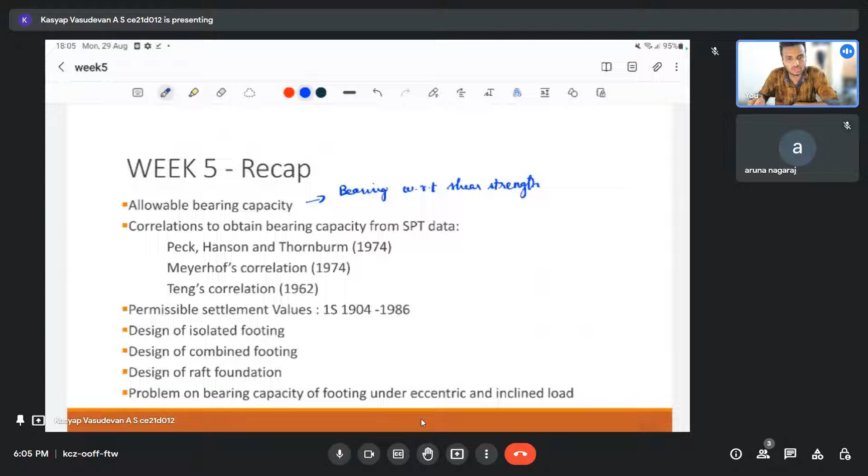One being our shear strength, in other words, bearing capacity with respect to shear strength that we have been already discussing all these days with respect to our different bearing capacity theories. And the other one is bearing capacity with respect to settlement.

So both the values might be different. We have to choose the minimum value among these, because if one is say 400 kPa with respect to shear strength and 200 kPa with respect to settlement, we cannot design with respect to 400, because our settlement will not be satisfied. And in many cases, settlement will be governing our allowable bearing capacity. So we can only allow whichever is the minimum value among these two.

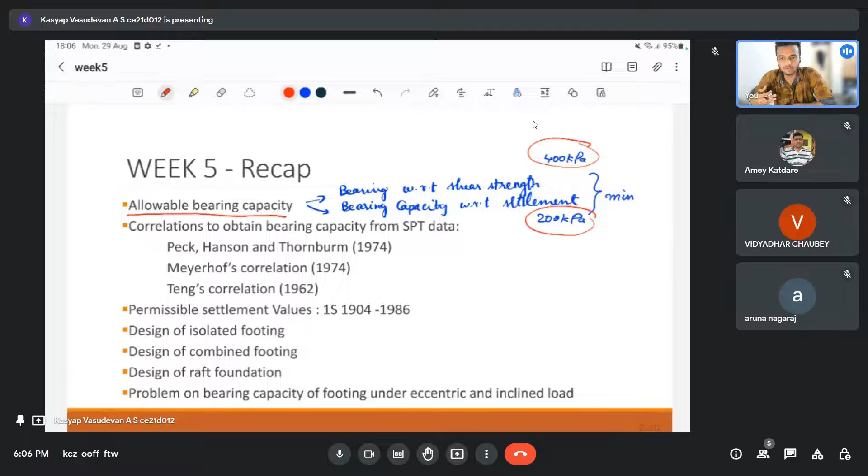So we saw last week how to arrive at the settlement. The point about that was the definition of allowable bearing capacity lies in the fact that which of these parameters is governing. Generally it could be settlement, because most of the cases shear strength failure will happen only after a huge settlement. But for our serviceability condition, we cannot afford to have settlement beyond some values that we'll see in the coming slides.

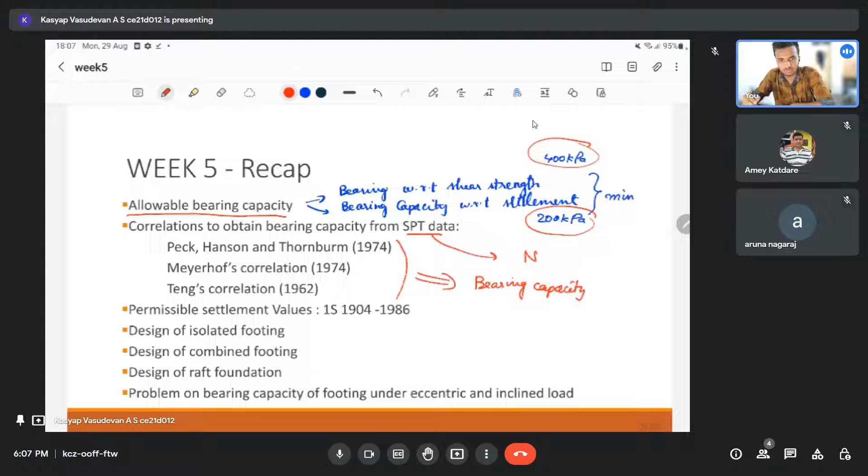And after this, sir discussed about different correlations. So we had talked about SPT test, from which we will get N SPT number, N value, which can be corrected, and that corrected N value can be used for different correlations to arrive at our bearing capacity, or even settlement. There are three methods discussed: Peck-Hanson and Thornburn method, Meyerhof's correlation, and Teng's correlation. All three were discussed, and even a numerical was solved on this.

After that, permissible settlement - this was the settlement I was talking about. We need to know these values, which are arrived at for different countries. It might be slightly different here and there. For IS code, they have specified certain settlements which can be allowed. So many times our bearing capacity might be very high when we are doing it with respect to shear strength, but with respect to settlement we'd have to check and see whether it is satisfying. If it is not, we'll have to redesign.

So design was also dealt with this week. We talked about design of isolated footing, combined footing, and raft footing. There are only small differences here and there. All three were discussed by sir.

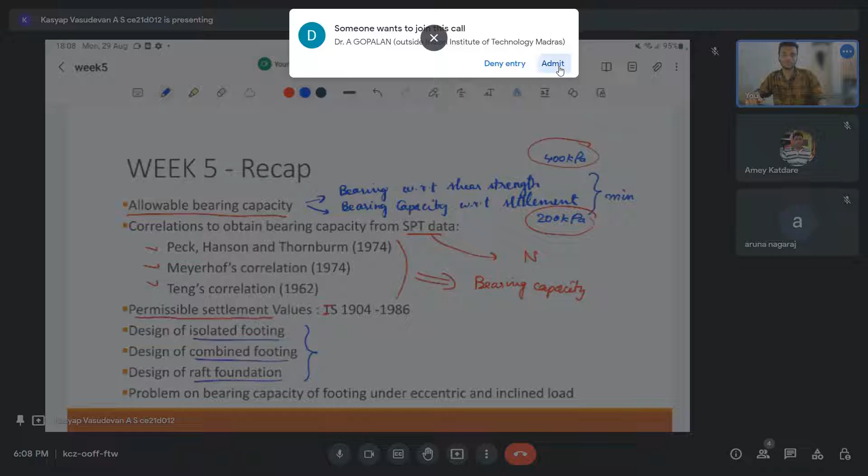And at the end of the week, sir also started solving a special scenario, a special question which dealt with both eccentric and inclined loading. In the two weeks before, when we started with bearing capacity, we were taking conventional problems, but here he began solving problems where we have a load which is both eccentric and inclined with an angle, with respect to the center line.

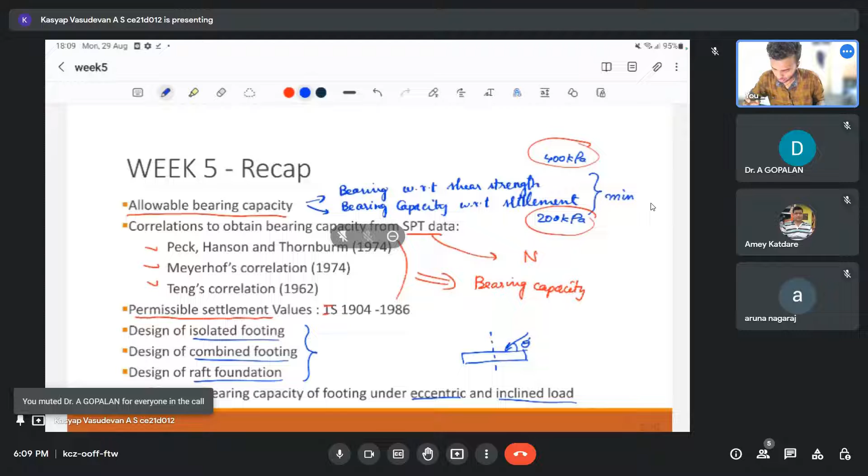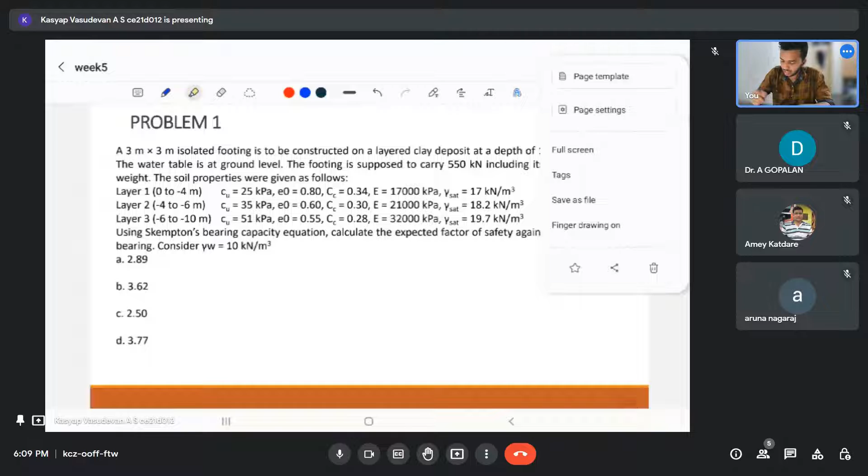Okay, so problem one. This problem deals with Skempton's bearing capacity equation. I think it was discussed in second or third lecture, he had solved a similar problem based on this. Skempton's bearing capacity equation is only applicable for clay soils.

So the basic equation is we have net ultimate bearing capacity directly. The net ultimate bearing capacity expression is given as Cu NC. This is the direct equation for Skempton's bearing capacity. From the equation itself, it's quite evident that it's only applicable for clay soil. So you have basically Cu and NC. Let us just define these terms properly.

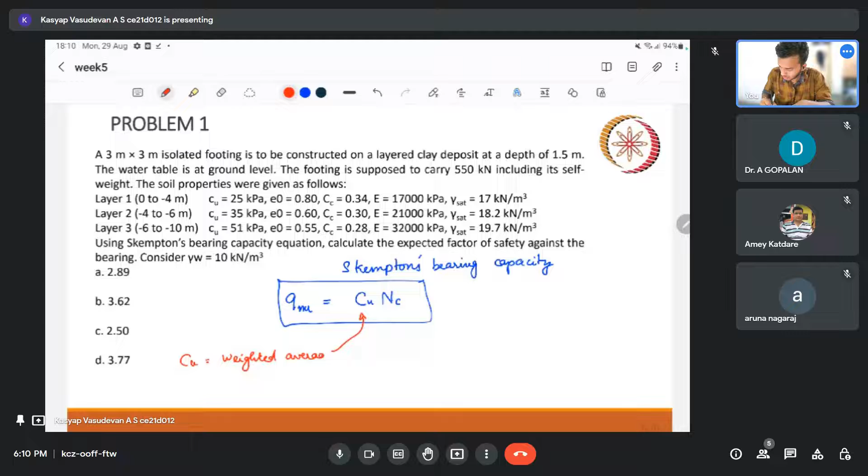Cu is nothing but our cohesion. But with respect to this question, we need to take a weighted average of cohesion within our influence zone.

When I say cohesion, I mean undrained shear strength. Cohesion influence zone - I'm defining it this way because we have a layered soil, so our influence zone might span multiple layers with different Cu values. The particular Cu value we're interested in should be within our influence zone.

The next term is NC, the bearing capacity factor for cohesion. This NC is specified as 5 times (1 plus 0.2 B by L) into (1 plus 0.2 Df by B). This is for rectangular footing.

So it's as simple as that, only two terms are there. In this question, we have a square footing of 3 into 3, at a depth of 1.5 meter. Since it's a square footing, we can simplify this. Since B and L are equal, I can directly write 5 into 1.2, into 1 plus 0.2 Df by B. This becomes 6 into 1 plus 0.2 Df by B. So I've simplified it for the square footing.

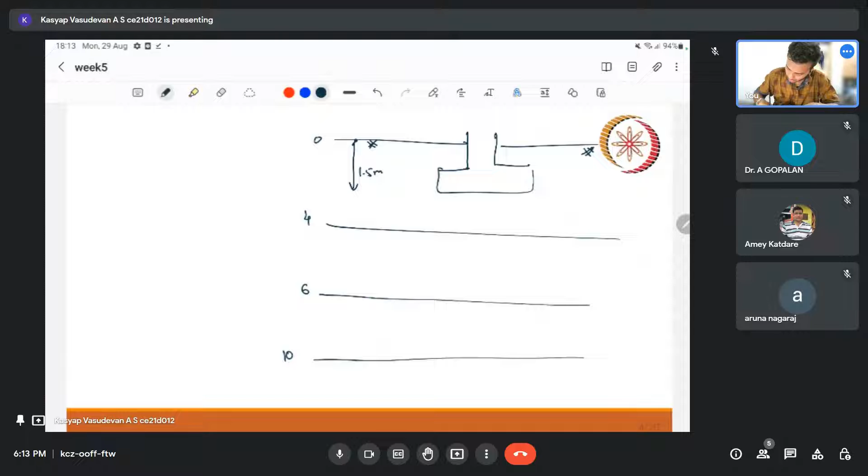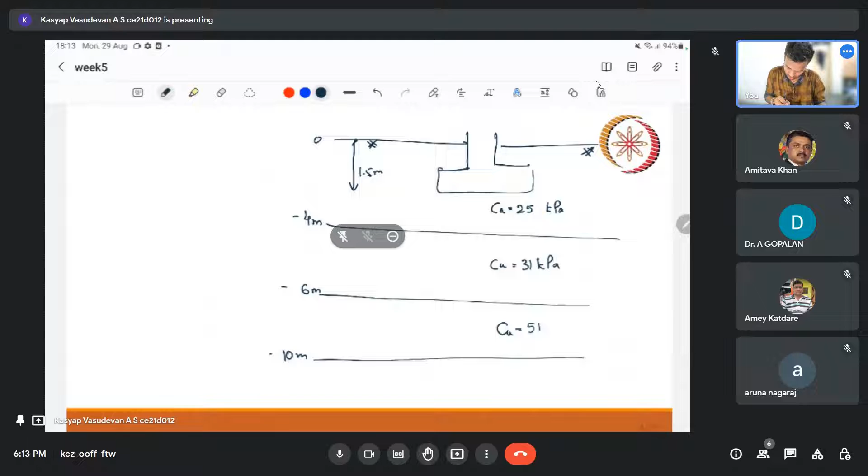Okay, so we have a layer, let's draw it to make it clear. From ground level, the depth of footing is given as 1.5, and we have three layers. Layer 1 is 4 meters, then 4 to 6, then 6 to 10 - so we have 0, 4, 6, and 10. We have Cu values 25, 35, 51. So Cu equal to 25 kPa, 35 kPa, and 51, C equal to 51 kPa. So layer 1, layer 2, layer 3. This is a 3 into 3 meters square footing, and our load is given as 550 kilonewton.

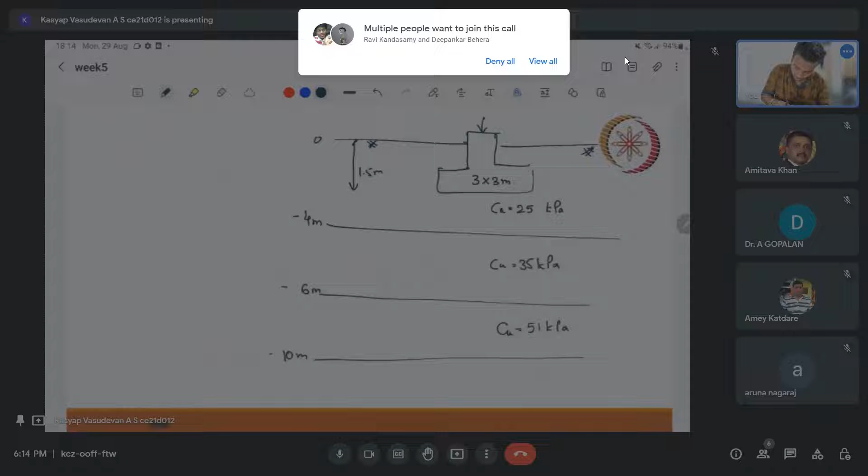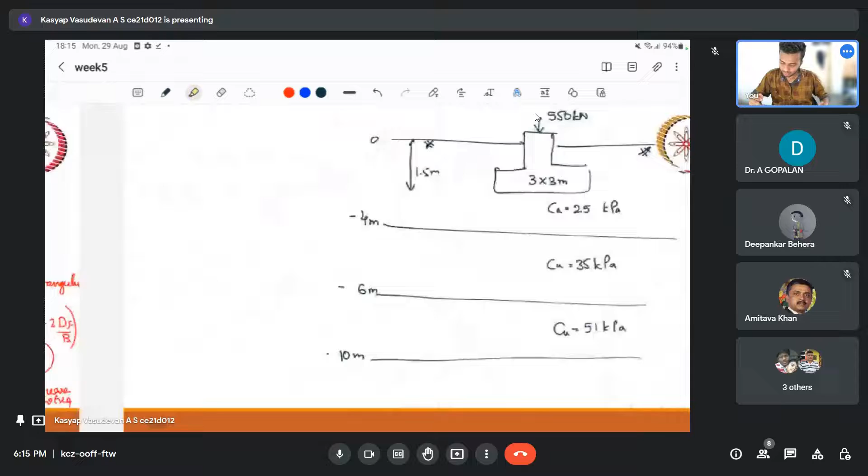So it's very simple - first, what are we supposed to find? We need to find, using Skempton's bearing capacity, the expected factor of safety against bearing. That means we need the bearing capacity with respect to bearing, and the actual acting pressure right now. If we find the ratio, we get the factor of safety - the capacity divided by the present load. So the net pressure acting right now, Qn, the present pressure is nothing but 550 divided by 3 into 3, that is 61.11 kilonewton per meter square.

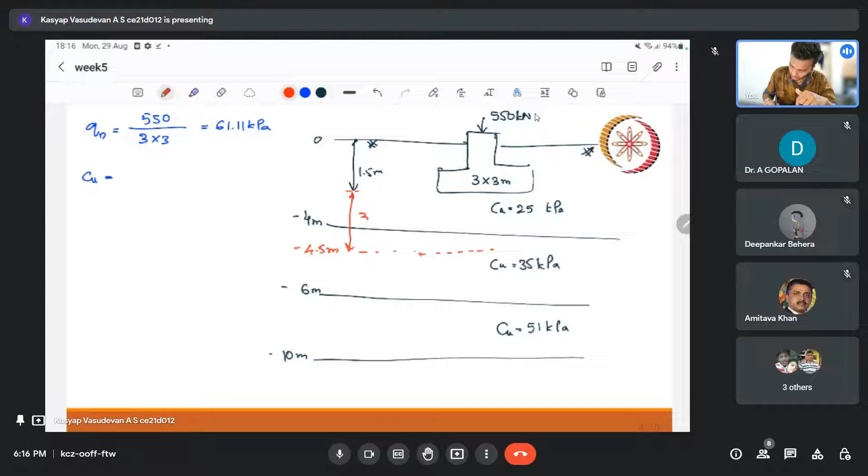Having said that, we need to find Cu, which is the weighted average. So what is the influence zone for bearing capacity? If you remember, the influence zone is the width of the footing - the depth which corresponds to the width. So this is 3 meter, below the footing I have to go 3 meter, that is the B value. So 1.5 plus 3 is 4.5, so this level will be 4.5 meter, that is 3 meter B. So this is the influence zone - within this zone, what is the weighted average of the cohesion?

So first 2.5 meter - this can be split into 2.5 meter and 0.5 meter. The first 2.5 meter is 25 kPa, the next 0.5 meter is 35 kPa. Divided by the total length of 3 meter - this is how you take the weighted average. The weighted average value comes out to be 26.67 kPa.

So this is the influence zone, 1B below. If you remember, for settlement we had taken 2B - that was only for settlement, whatever is in between 2B we have to consider. We calculated settlement last week - the reason behind 2B was because of the Boussinesq equation, where we assume the pressure bulb for 10% of the applied pressure, which will be 2B deep from the footing. That's why we take 2B for settlement. Here it's bearing capacity - that's because of our failure surface, our elastic zone is assumed to go only up to B, so we take that.

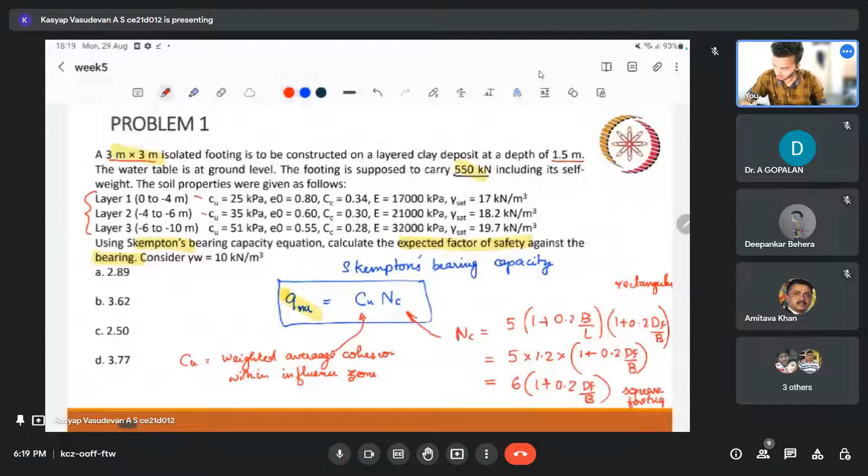This was quite straightforward. In the next question, we are extending this with the same data. The next question says: consider the data given in the previous problem, estimate only consolidation settlement after applying all necessary corrections.

Give depth correction factor. So here we are supposed to find consolidation settlement, and correction factors are given: depth correction is 0.89, pore water pressure is 0.7. We have pressure distribution. This is quite the same as we had done before in the previous classes.

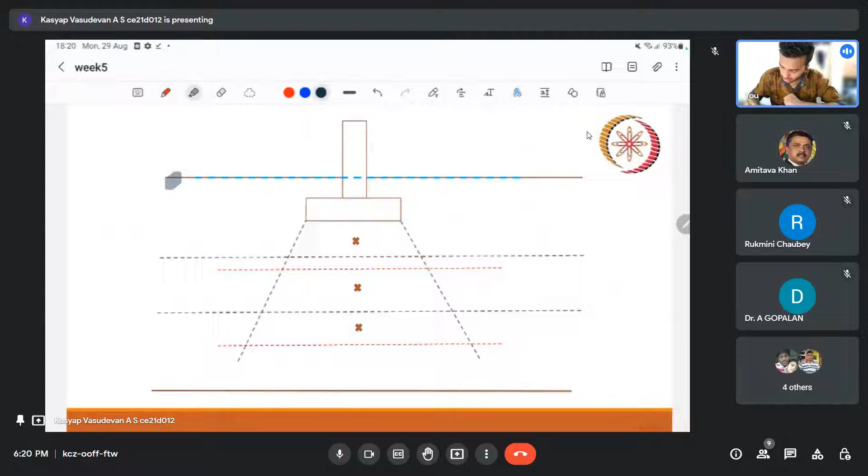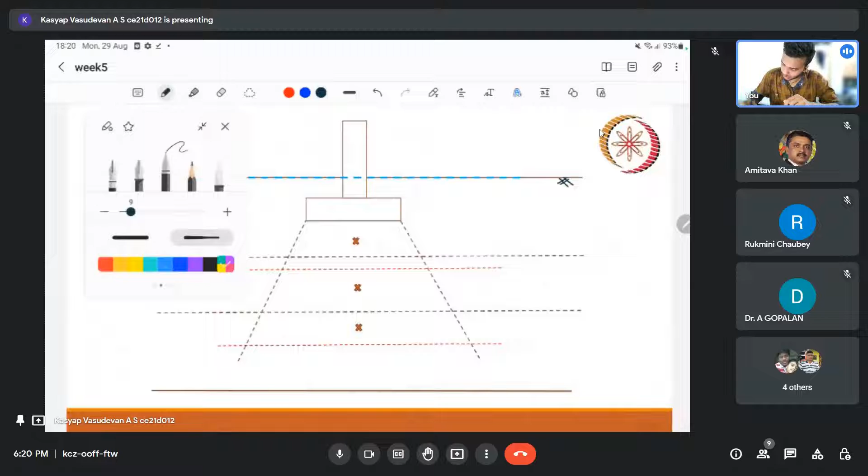We have different layers, so let us write it down properly so this becomes easier. This is the ground level. Have they mentioned water table? Water table is at ground level, so this is the groundwater table.

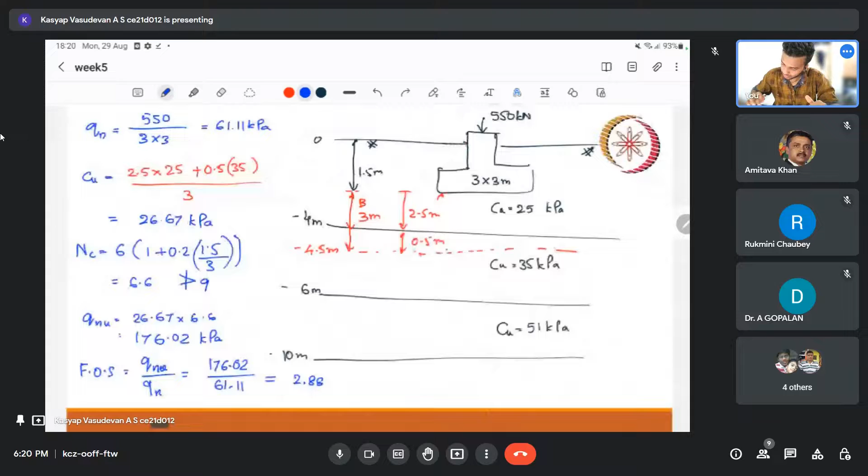Let me write whatever is required for us. Our cu value is for layer 1 - here we did not want cu. We have initial void ratio value, compression index value, and these things are not required now. Okay, density.

Just for clarification: e naught equal to 0.8, Cc equal to 0.64, gamma sat equal to 17 kilonewton per meter cube, E is our modulus equal to 17,000 kPa.

In layer 2, we have e naught equal to 0.6, Cc equal to 0.3, gamma sat 18.2, E is equal to 21,000 kPa. Layer 3 is equal to

0.55, Cc equal to 0.28, gamma sat equal to 19.7 - I'm writing from the question itself - and E is equal to 32,000.

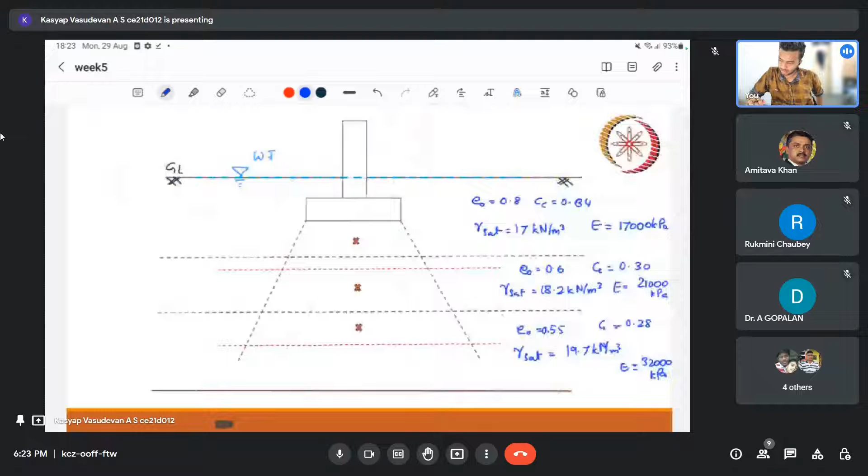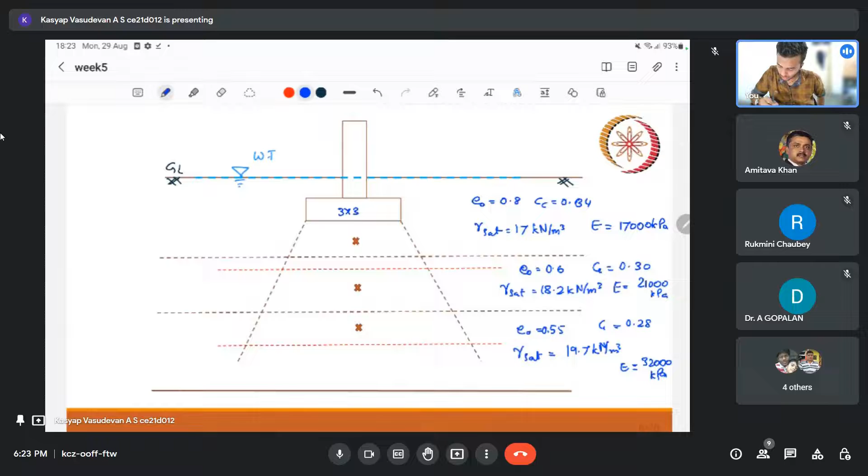So we have layer 1, layer 2, and everything. I told you before about the influence zone - we have 3 into 3, and this is 2 is to 1. For layer 1, we are interested from the level of the footing. What are these values? 4 meter, 6 meter and 6 meter and 10 meter.

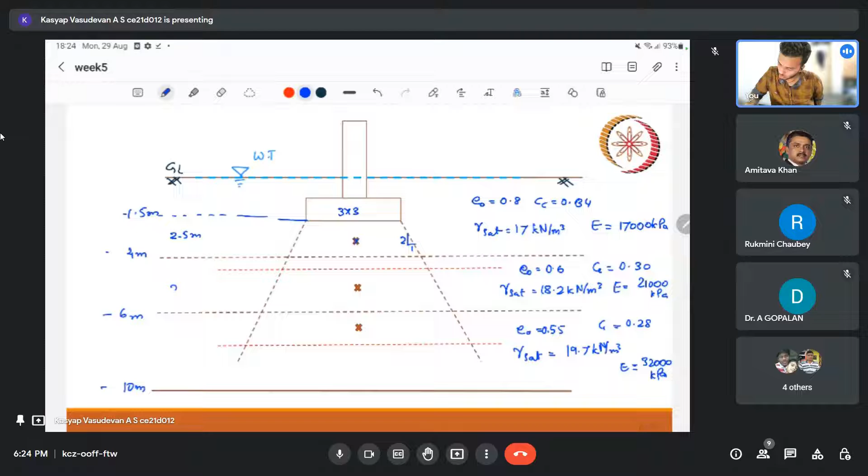So I'm interested at the middle point of this layer, that is nothing but minus 1.5 meter. So here we have 2.5 meter, 2 meter, and our influence zone for bearing capacity was 1b - this is the red line - but for settlement it is 2b. 2b means here b value is 3, so 2b will be 6 meter. So from 1.5 meter to 6, we have to add, so it will be 7.5. So this layer here, it will be 7.5 meter.

So this will be 1.5. Now we have all the layer depths. For each layer, we can find the settlement. When we talk about settlement, we have to consider the middle of that particular layer we are interested in - those depths we have to be careful about. We will find the overburden pressure at that particular point, because we are assuming all these properties are uniform throughout that layer, and we consider each separate layer as a single layer, taking three different settlements and adding them at the end.

So the basic immediate settlement, we are not much concerned about immediate settlement here because it's a clay. The predominant, bigger chunk of the settlement will be contributed by primary consolidation since it is a clay. But in exact calculation, we need to consider all three.

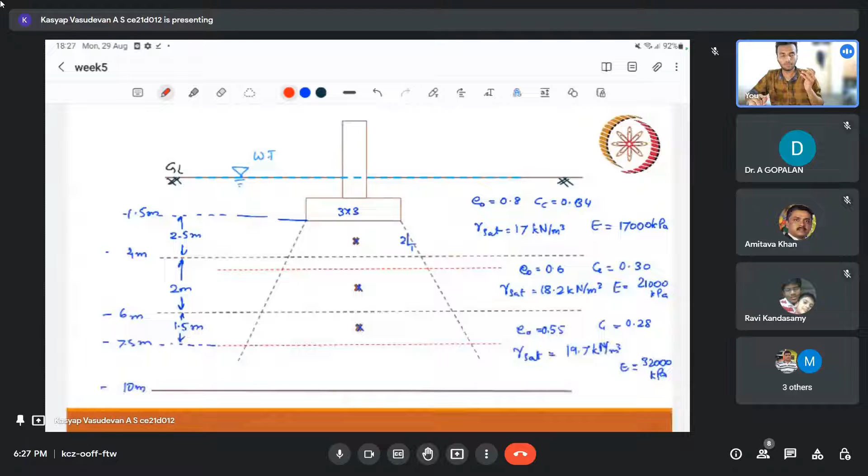Since we don't have a coefficient of volume compressibility, we cannot use this particular equation. So let's start finding for each layer that we have. We need to find pressures, right, overburden pressures. So let us begin. Overburden pressure for layer 1.

Let me write like this: sigma 1 dash, sigma 2 dash, sigma 3 dash. So for layer 1, we have 2.5 meter thickness.

Its center point is at 1.5 plus 2.5 by 2, right? And our saturated unit weight is 17. We can take gamma W as 10. So our overburden pressure will be submerged weight into depth. Depth was 1.5 plus 2.5 by 2 because we need the middle of the layer. So this turns out to be 19.25 kPa.

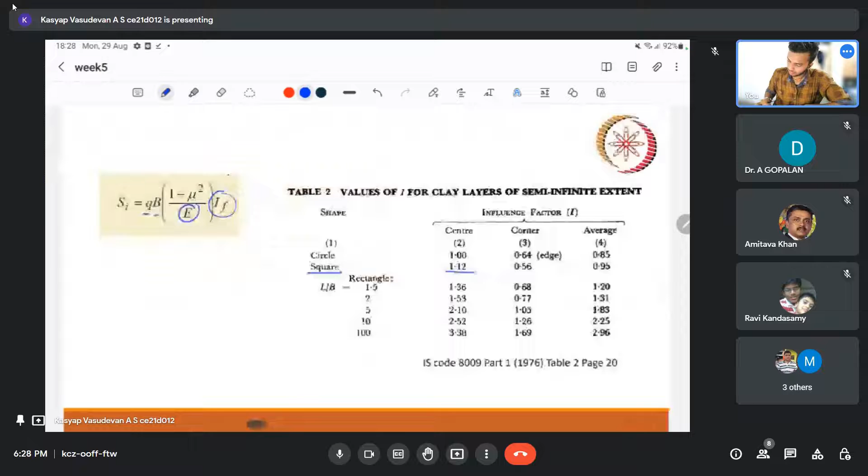Because H1 is equal to 2.5. Here H2 is equal to 2 meter, our density is 18.2.

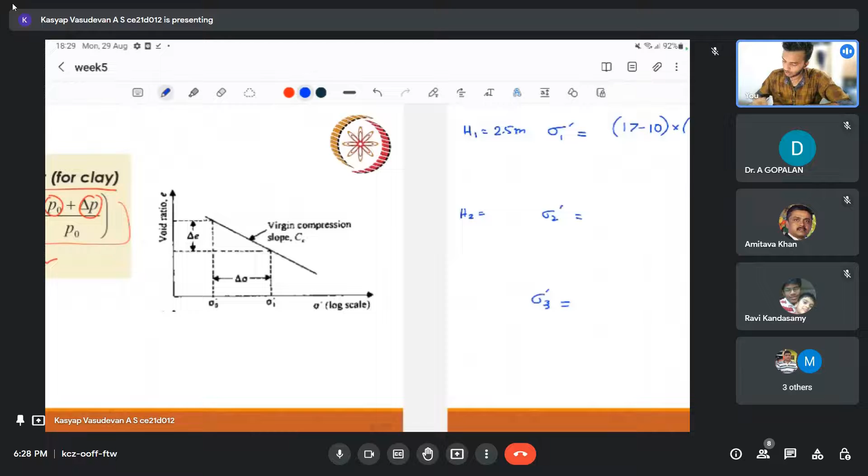So the overburden pressure due to the first layer will be, this complete layer, right? So the whole 4 meter has to be considered for the first layer, then we have to take the half. So 17 minus 10, that is layer 1 of 4 meter thickness, plus 18.2 minus 10 into our 2 meter layer, middle of the 2 meter layer is 1 meter. So this will be 36.2 kPa.

If at all you are doing it parallelly, just correct me if I'm wrong. And layer 3, let's move on to layer 3. Layer 3 is 1.5 meter thick, and both the complete layers at the top we have to consider.

So 17 minus 10 into 4, that's layer 1, and layer 2 completely if we take, this layer was 2 meter, right? This layer h3 is 1.5 meter. So this is 2 meter, plus our third layer is 19.7 minus 10.

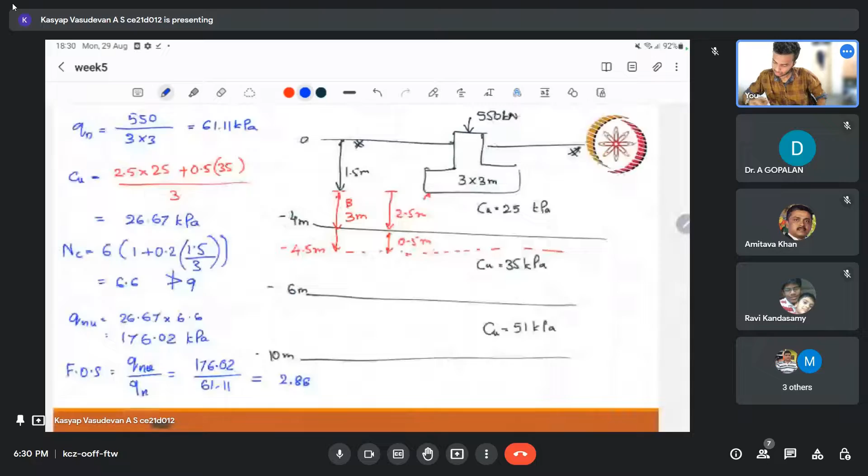Everything is under the groundwater table, that's why I'm subtracting by 10, assuming gamma w is equal to 10, because I guess in the question it was given as 10, so we'll take 10 only.

Into half of the thickness, right? So the half of this is 1.5 by 2. That is 58.95. So that's there, so we have sigma 1, sigma 2, sigma 3.

Now we need the increase in pressure, right? So delta sigma 1 dash. Here the challenge is we have to take this particular distance. As you remember, whatever depth we are going, we have to add to the dimension, because since it is 2 is to 1, if this is z, this is also z by 2, and here also it is z by 2.

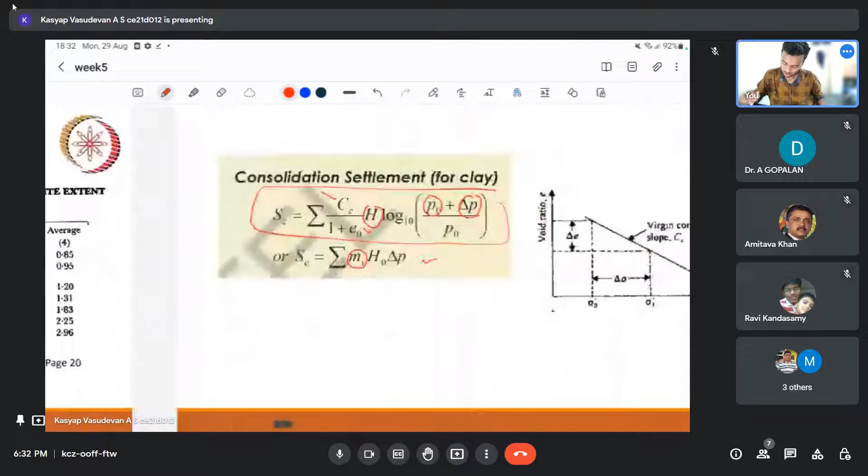So overall we have to add z to the dimension. In the other direction also it happens, because perpendicular to this screen also it is spreading in that fashion, so z we have to add. Here z is half of 2.5, so our load is the same as the total load, but divided by 3 plus 2.5 by 2, that is 1.25, into 3 plus 1.25. This turns out to be 30.45.

So sigma 2 dash, similarly what is the depth here involved? For sigma 2 it is 2.5 plus 1, that is 3.5. So 3 plus 3.5 into 3 plus 3.5. This turns out to be 13.018.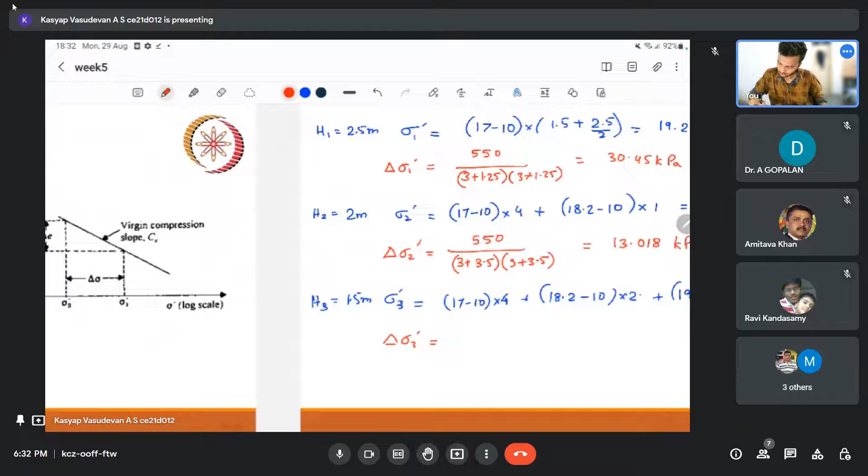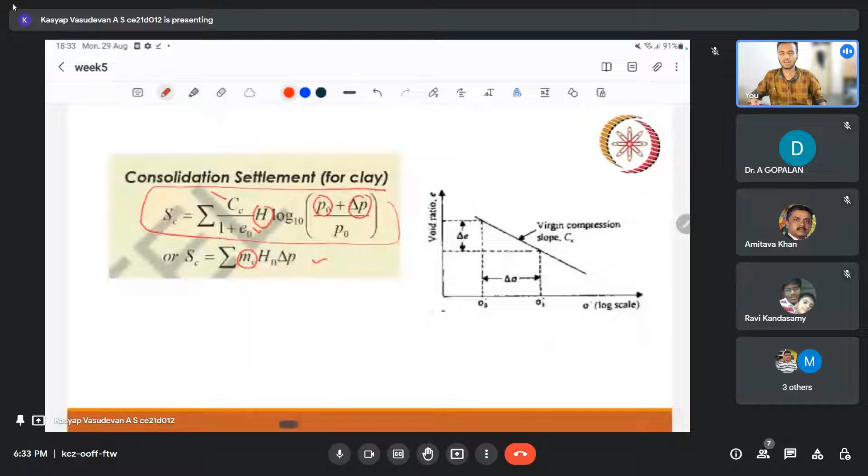And the increase in pressure at the depth of the next depth is this point. So 2.5, 2, that is 4.5. 4 plus half of 1.5. 4.5 plus half of 1.5 is 0.75. So it is 5.25, right? So 550 by 3 plus 5.25 into 3 plus 5.25. This is 8.0.

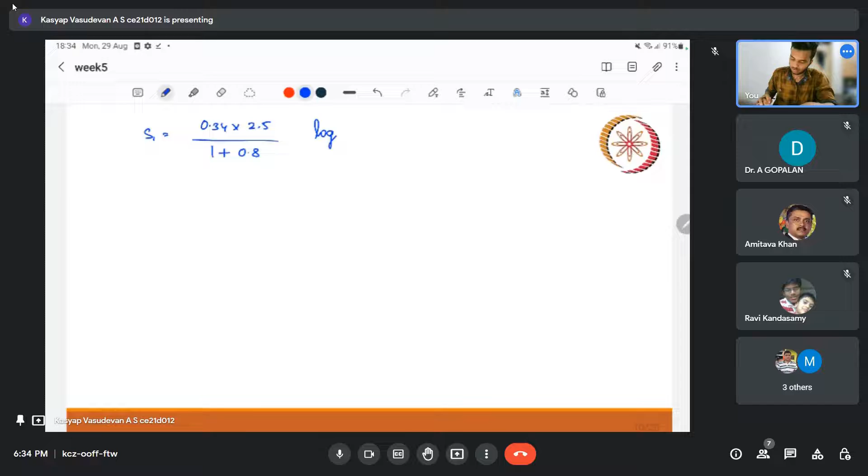Okay, so we have all the ingredients now. We have to just substitute and get the answer. So our settlement 1 will be equal to CC H, right? CC is 0.34 for layer 1, H is 2.5 divided by 1 plus E naught. E naught is 0.8, and log of sigma 1, 19.25, 19.25 plus 30.45 divided by 19.25. So S1 turns out to be 194.5 mm.

Okay, to be precise, the answer that we will get is 0.1945 m, because our H that we have given is in meters. So whatever that unit is, we'll get.

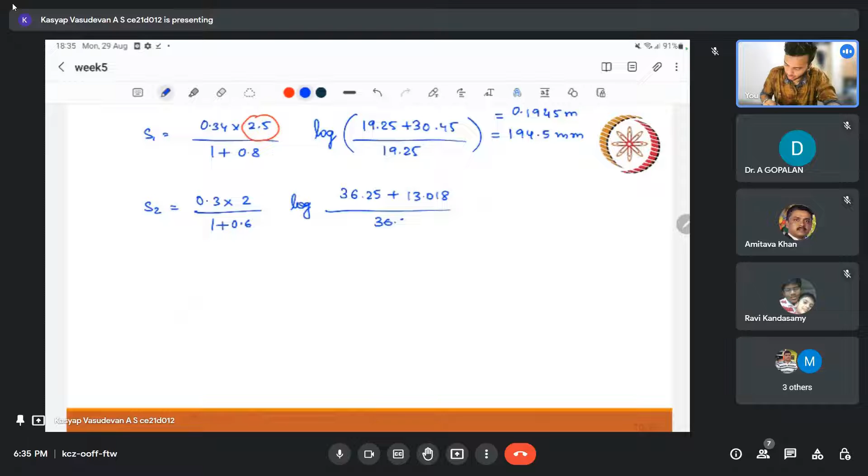I'm just writing directly in mm, and the second layer is 0.3, that is our CC value, into thickness is 2 meter divided by 1 plus 0.6 log of our 36.25 is the overburden pressure plus 13.018 divided by 36.25. This turns out to be 50.03 mm.

So S3 is equal to 0.28, that is our CC, 1.5 that is our thickness, divided by 1 plus 0.55, log of 58.95 plus 8.08 divided by 58.95. So as we are going, this turns out to be 15.11.

As we are going deeper, the settlement is decreasing for obvious reasons. The soil is stronger, and the CC value is reducing. So all those reasons.

So what is the total? The total, if you do, I think you get 259.64 mm.

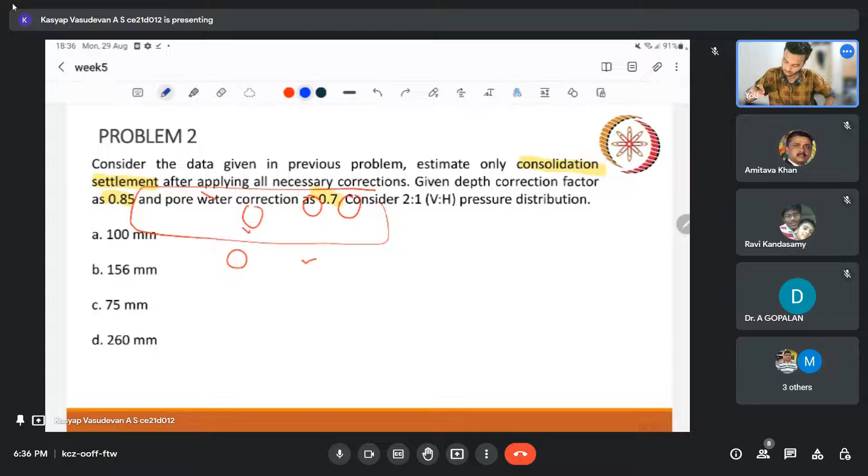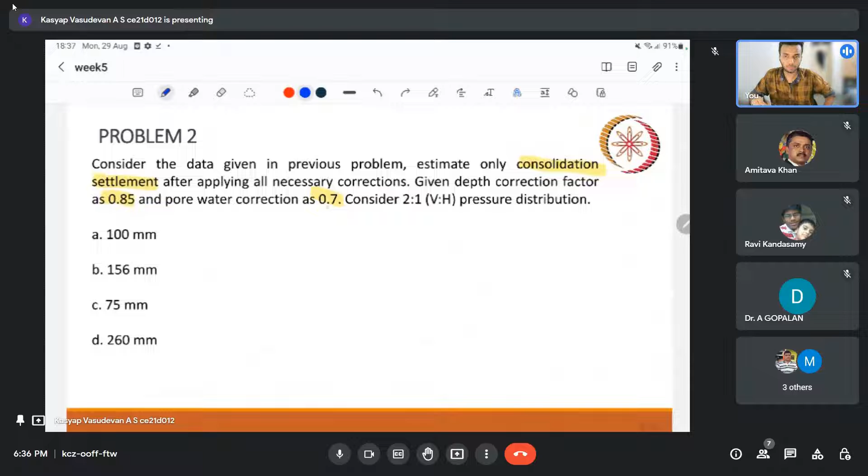Okay, so we have found the total settlement, but in the question we are supposed to do corrections also. So depth correction they have given 0.85. Pore water pressure correction factor also 0.7. Sometimes it may not be given directly, so let us take it, just first substitute.

Depth factor is 0.85, and our pore water pressure factor is 0.7. So we can directly reduce the settlement. Corrected settlement is equal to 259.64 into 0.85 into 0.7. This turns out to be 154.48.

Okay, we have an option 156.

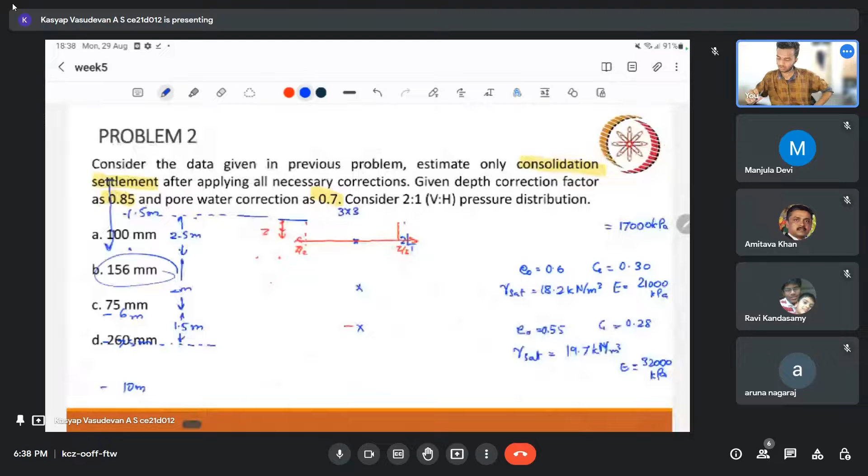So having said that, what is the takeaway from this question is, we have found a settlement, but is it okay? If you look at the code, you will come to know that this should not be greater than 75 mm for this particular condition. This condition is isolated footing in clay, square footing in clay, right? The limit is 75. We'll see how the limit at the end.

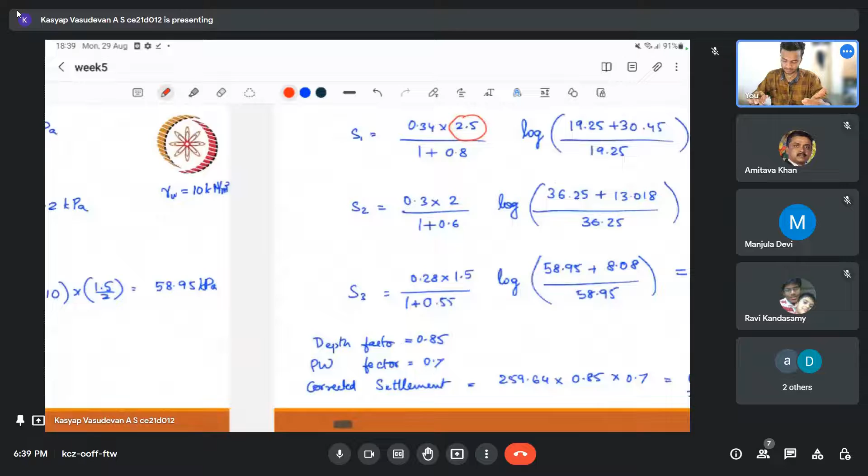But this thing is not satisfactory. This particular design is not satisfactory. So to suffice settlement, we can suggest them to bring this down a little deeper. Either you can bring it down or you can increase the dimension of the footing in order to satisfy our settlement criteria. Okay, so here another question that arises - they have given it directly.

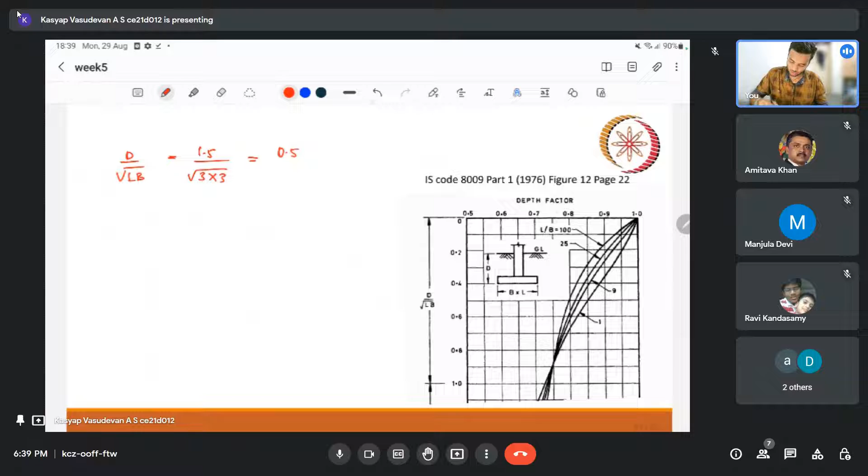So if you remember, in the last week we had solved a problem dealing with this depth factor. So just to check, since we already have this D by LB, we know D is 1.5 and LB is 3 into 3, we'll get 0.5. So if you check this graph for L by B ratio 1 and this 0.5, we'll get 0.85. This is 0.85, right? That's what they have given directly. So even if this is not given, we can find it.

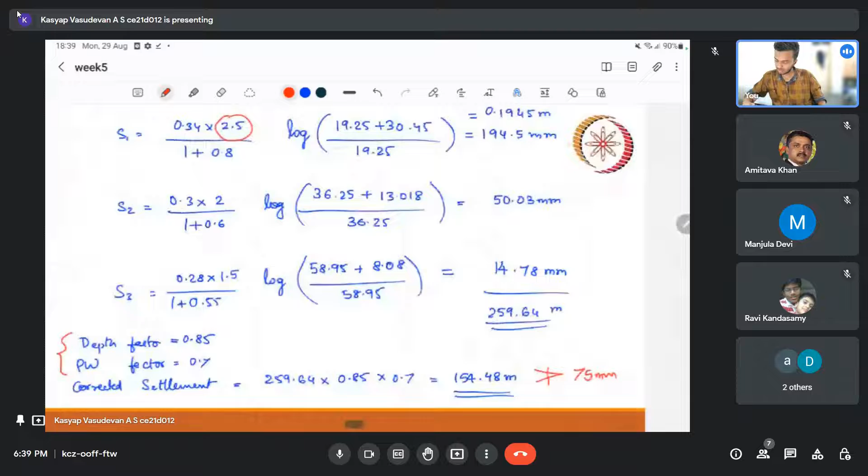Even if the depth factor is not given, we can find it from this graph. This is IS graph from IS code. Second one is pore water pressure correction factor. For that, if it is not given, you can take 0.7, I guess. But if you have more details like Skempton's pore pressure ratio, Skempton's pore pressure parameter - it's not a constant, it's called a pore pressure parameter, I'll write pore water pressure parameter. Two parameters are there, A and B. Out of that, if you have A, there is again a table in IS code from which you can get this correction factor for water pressure.

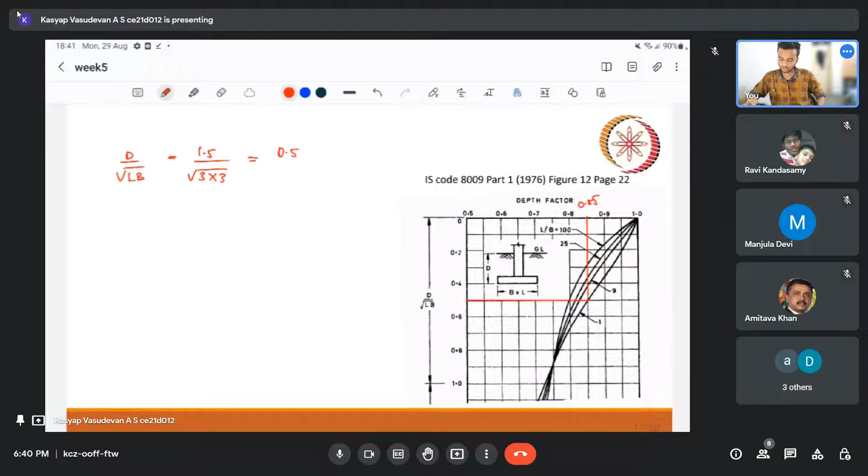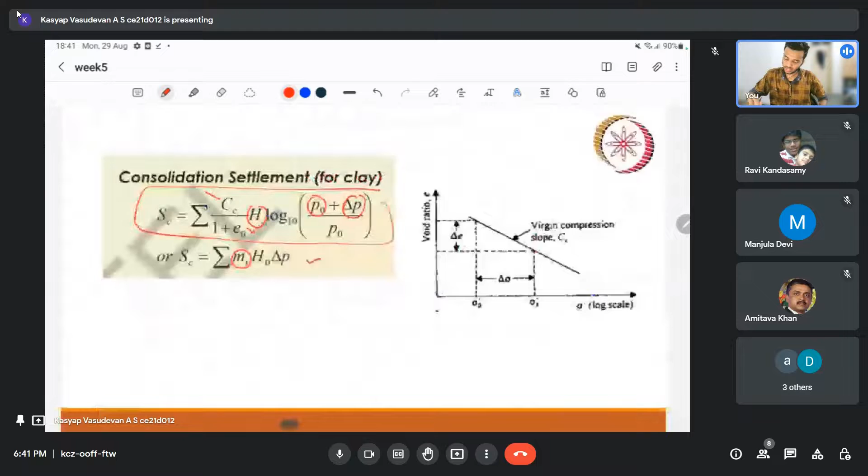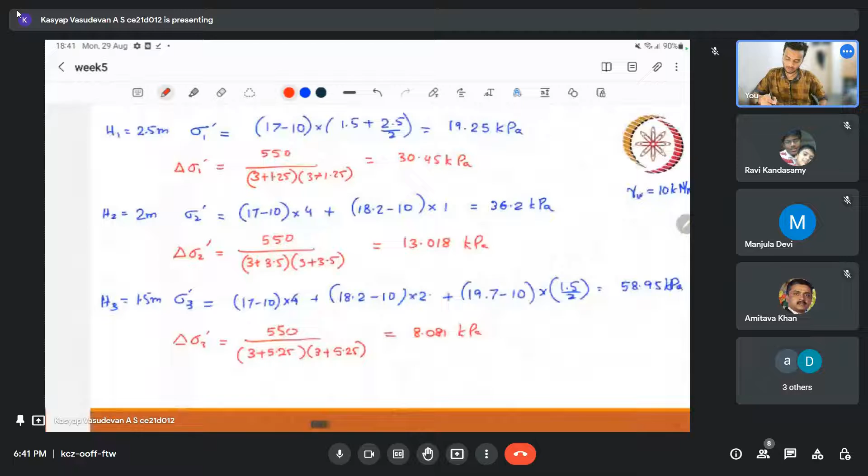So is there any other takeaway from this? Yeah, we can understand that either we can increase our dimension into 3, or we can bring it down. If you bring it down to 4 meter, it will be very good, because if you observe, the first layer is contributing to most of the settlement. So if you avoid the first layer, we can have a very good advantage. That is also an option. So whatever changes you are doing, we will have to redo all this settlement and check whether it is getting satisfied.

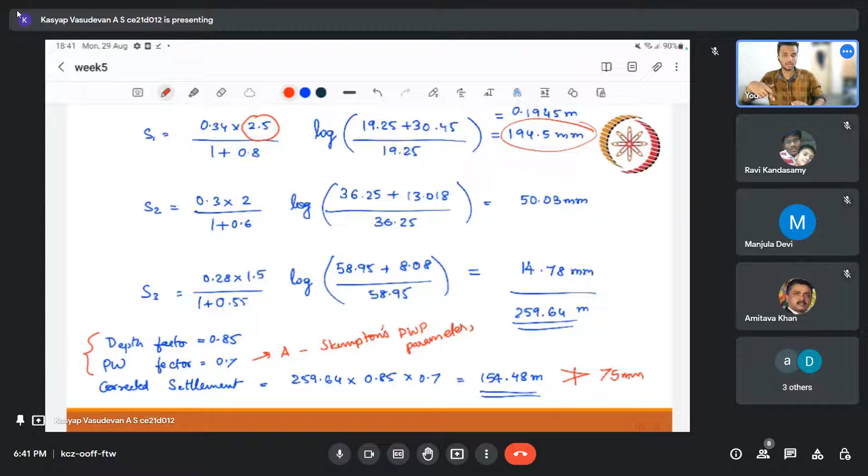Moving on to the next question. The next question actually has very less to do, but let us see.

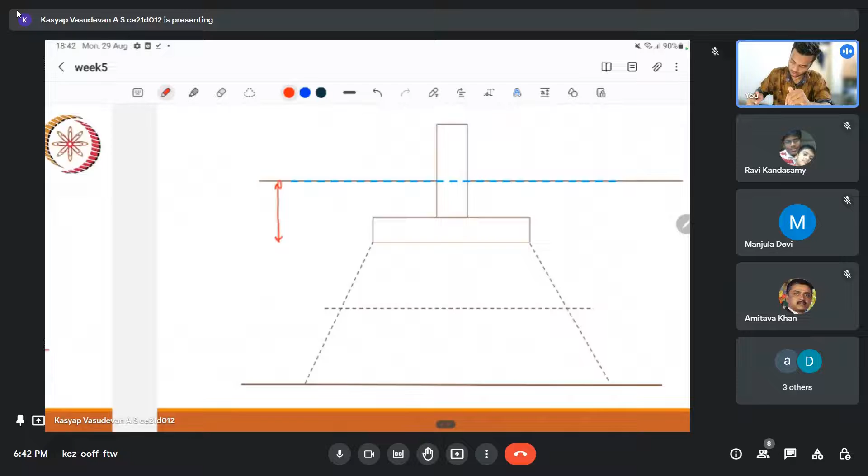That is a question. So we have the N value at different depths. We know the dimension as well as the depth of the footing. So the depth of the footing is 3.5 meter, and our breadth is 4 into 4.

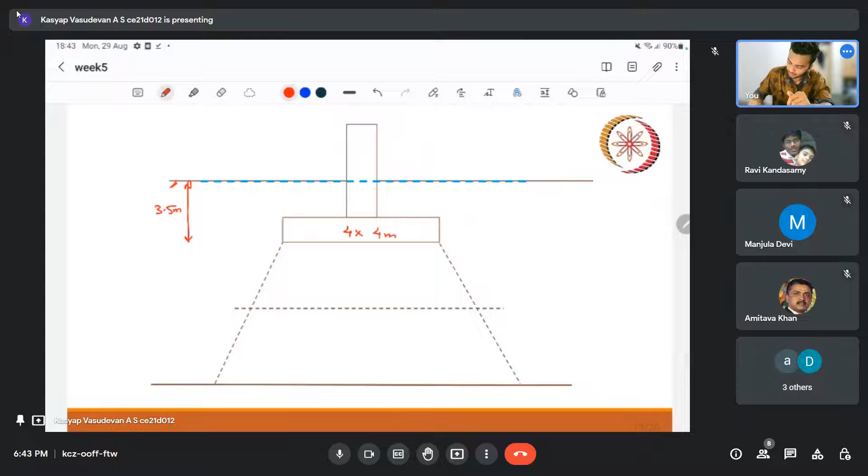So we know that for bearing capacity we have to take 1B, right? So from the footing we have to take 1B, that is 4 meter. So this is our influence zone when we are talking about bearing capacity. So whatever SPT value is there in this range, we have to take the average. So this layer is at minus 3.5 meter, this layer is at minus 3.5 meter, and this layer will be minus 7.5 meter. So from 3.5 to 7.5, whatever value we have, we have to take the average.

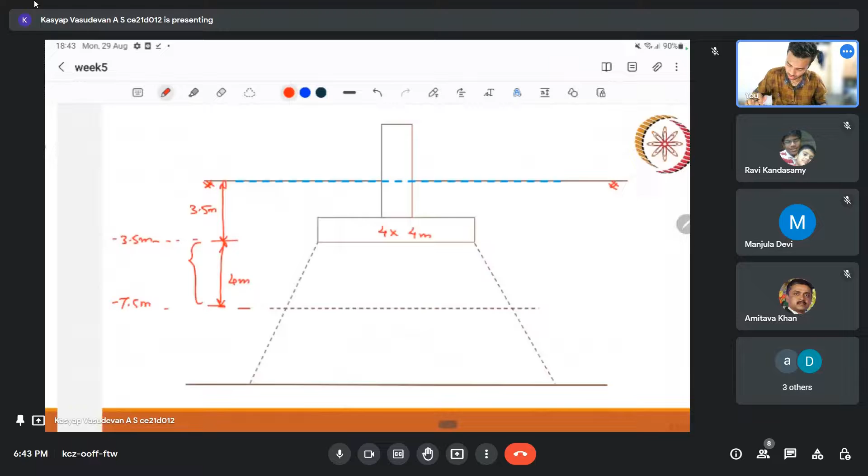So that will be N average. Since it's already corrected, we need not worry about it. From 3.5, that is 24, plus 30 plus 35 plus 32 plus 41. We have 5 entries, so we'll divide by 5. We'll get 32.4, out of which we have to give the smaller value. So 32. The answer is 32.

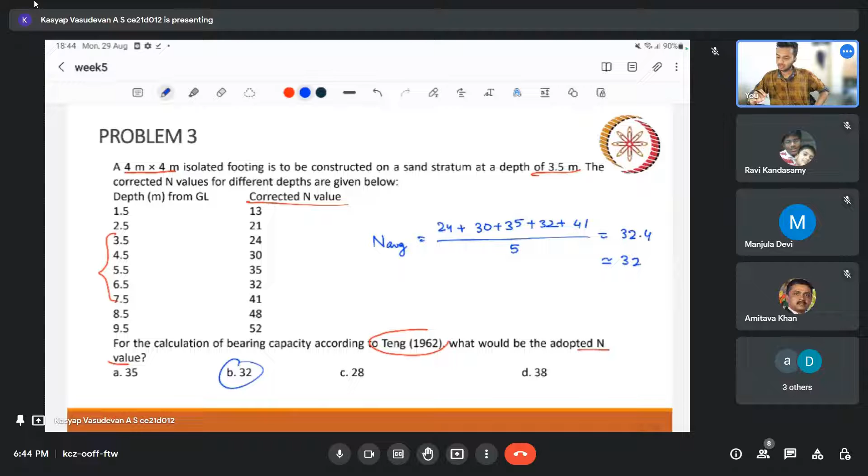But this question is very small. So that is the thing. Okay, since we have this question, we can extend it. Let us find the bearing capacity using Teng's equation.

So bearing capacity for Teng's equation is given like this for strip footing, and square and circular footing. So this is the equation we have to use here since we have a square footing. Let us see these terms. So here the N term we know, we already talked about it, we already found it, 32. It should be the average within our influence zone.

B we know, the breadth, RW and RW dash - if you remember, we have used this somewhere last week. So RW and RW dash, you can find out, there is a chart for that. DF is the depth of the footing. So everything we know.

This is the average. RW and RW dash we have to find out, right? So let us find out. This is, I hope you remember, the diagram that we use for finding RW and RW dash.

Here, okay, before that - here this RW and RW dash is nothing but interpolation from 0.5 to 1. This is actually 1, this is a printing mistake. For our depth, so for RW, we have to check DW by DF. So our DF is this thing.

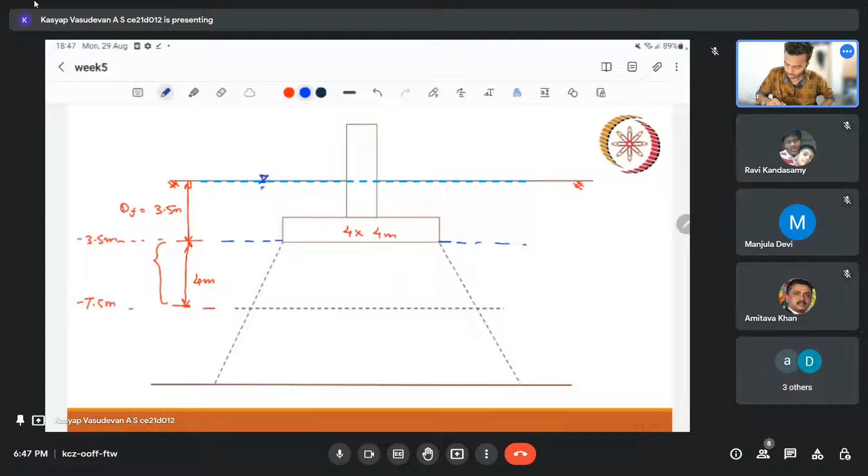Oh, okay, my bad. Let us modify. If it is at ground level - no, if it is at ground level, both will be 0.5. DW will be 0, and D dash W will be also 0. So both RW and RW dash will be our least value, that will be 0.5. So let's just modify this as, sorry, at footing level. So what if our groundwater table is at the footing?

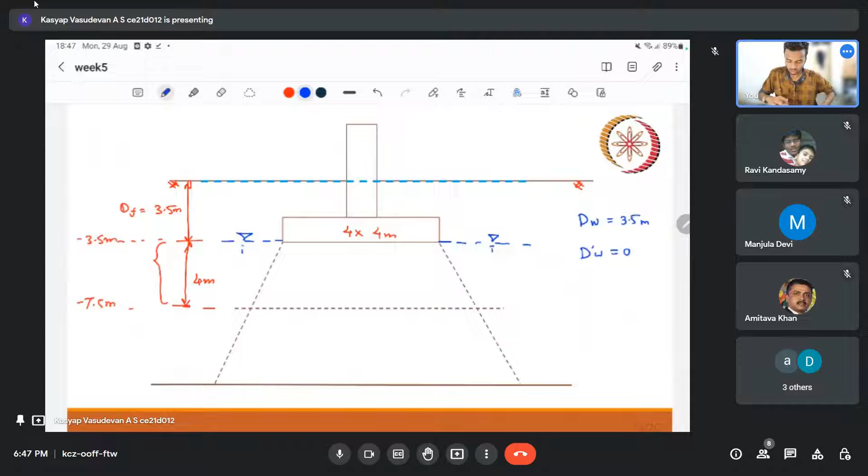If it is at the footing, our dw is equal to 3.5, and d dash w is 0, because d dash w is the distance from the bottom of the footing. So it's 3.5. And 3.5 dw by df will be 1, right? So for 1, our this will be 1. So rw will be 1, and r dash w, this is 0, since d dash w is 0. So rw dash will be 0.5. So if that is the case, we have both the things.

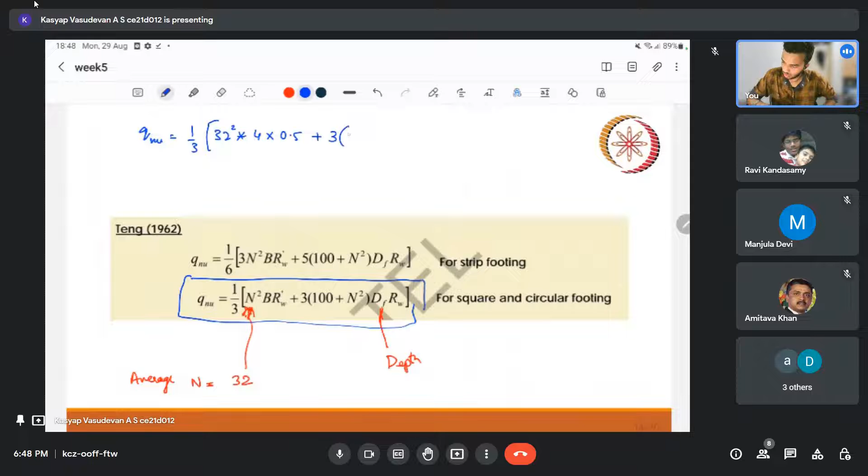So if we just substitute it, qnu is equal to 1 by 3, 32 square into 4 into 0.5, this is our RW dash, is 0.5, plus 3 into 100 plus n square. So n is 32. 32 square df. df is nothing but 3.5 into 1. Okay, let me just verify it. 32 square.

Okay, so the value comes out to be 4616.67 kPa.

Okay, so we have the QNU. Then to get to QN allowable, safe, we have to divide it by factor of safety, right? But the factor of safety generally that we can give is 2.5. So if we divide it by this thing, so 4616.67 by 2.5.

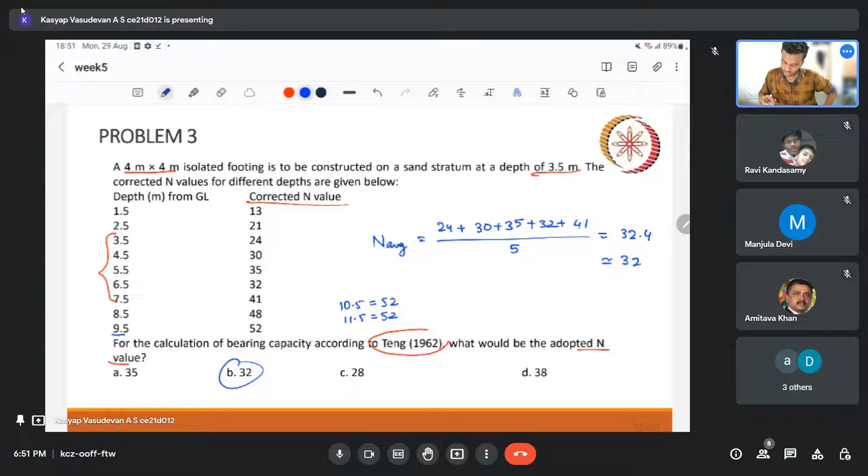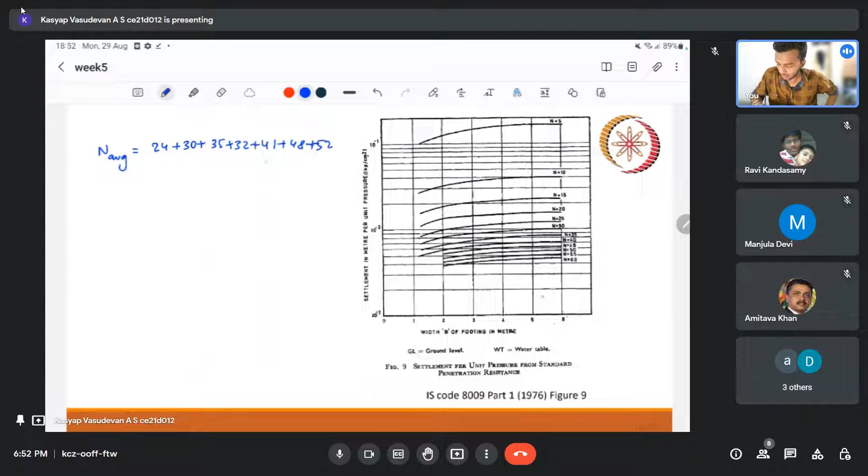So these things we have to consider when we are taking the SPT value. Since I have just extended this question, let us assume till 11.5 it is 52 itself. So let that data for 10.5 be 52 and 11.5 also be 52. If that is the case, I will take the average n value. If you add from 3.5 to 11.5, we will get 24 plus 30 plus 35 plus 32 plus 41 plus 48 plus 52 plus the last two I'm assuming as 52 itself on a safer side, by 9. There are 9 entries. This comes out to be 40.67. We can take it as 40. So n average is 40.

So this is a very interesting graph because we are getting settlement directly from SPT value. So here we have width at the bottom, that is 4 meter for us. From 4 meter, if you take 4 meter and our n value is 40, for 40 you will get this particular value, and this is in log scale. So if you check the log scale, this will be like 1 2 3 4 5 6 7 into 10 to the power minus 3, and the unit is meter per pressure. So this much meters for 1 kg per centimeter square. So for each 1 kg per centimeter square they have given the settlement. So this 1 kg per centimeter square is nothing but 100 kilonewton per meter square.

So this is nothing but 7 mm. But we'd have seen that actual settlement we have to divide it by water table correction. Actual settlement is that obtained settlement.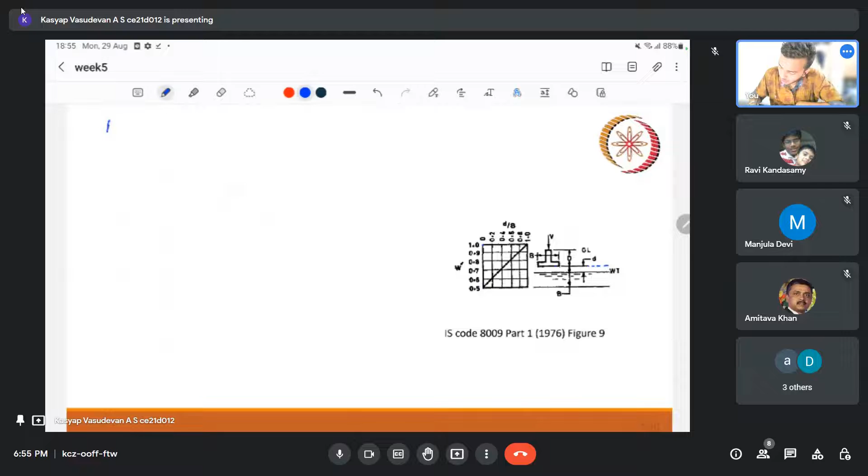So how to get, let us see, let us say our allowable for footing in sand, let us say the allowable settlement is 50 mm. Why 50 mm and all, we'll see.

If you remember, there is a table extracted from the IS code. For isolated footing, we can take 50 mm as the allowable settlement. There's a detailed table in the IS code. So if 50 mm is the allowable settlement, what will be our allowable load? For what we have, it's 14 mm for each 100 mm, 100 kPa. So our allowable QS will be such that QS by 100 ratio should equal the corresponding settlement, that's the idea.

So QS will be equal to 357.14 kPa. Just look at the difference: using Teng's equation, we got a very extremely high value, 1800, almost 6 times. But with respect to settlement, we have a much lower value. So that's why these things are important.

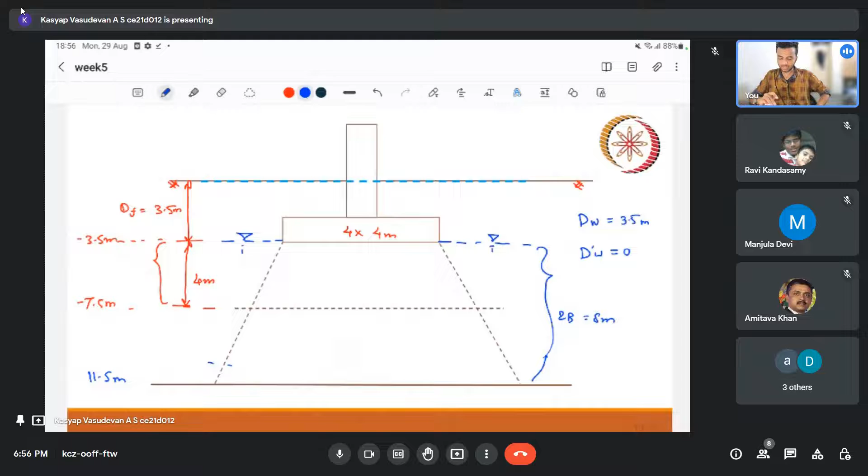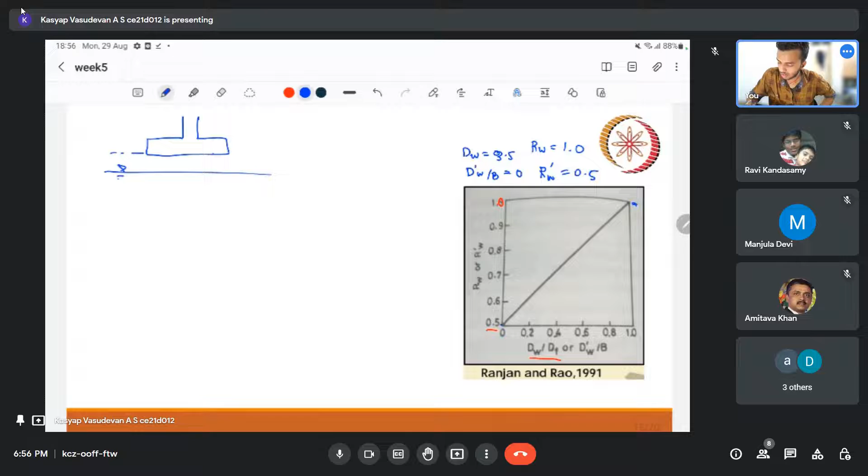So to extend this, since this was at the footing, the groundwater table was at the footing, it had a very lesser impact. So just to have a better understanding, let us assume the groundwater table is 1 meter below the footing, just so we can cover more cases. What if it is 1 meter below footing? What will change?

Our rw and rw dash will change, right? So our new dw is 4.5, and d dash w is 1. So dw by df is equal to 4.5 by 3, that is...

Sorry, dw by df cannot go beyond 1, right? Look at the range: here we have dw by df as 0 to 1, so it cannot be greater than 1. If it is greater than 1, we have to take it as 1. So though this is 1.5, we have to take it as 1. So our rw will be 1 only. But for rw dash, dw dash by b is 4, so 1 by 4 is 0.25. For 0.25, if I draw a line, you can interpolate also, and by interpolation you will get rw dash as 0.625, because it's changing from 0.5 to 1.

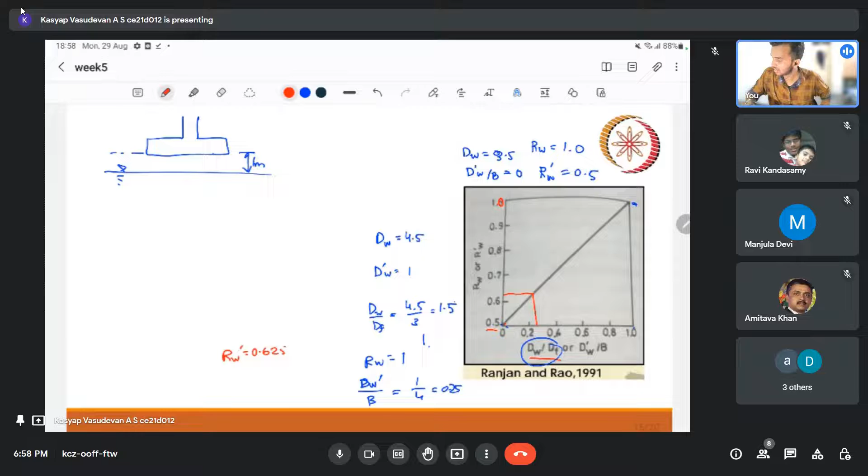Okay, so rewriting Teng's equation, you will get QNU is equal to 32 square into 4 into RW dash, that's 0.625, plus there's a 1 by 3 if I'm not wrong, 3 into 100, plus 32 square, df is 3.5 into rw is 1.

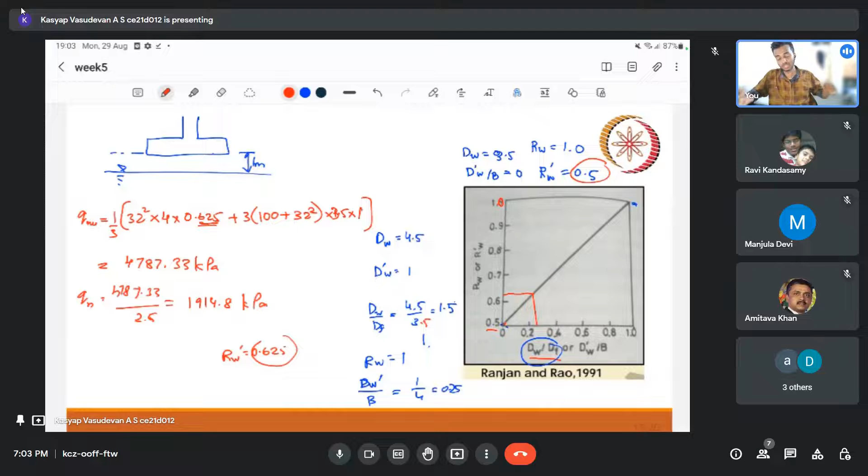But however, we know that it's not governing our design, so we'll have to check the settlement just like before. We can use the same n average. The only thing that will change here is our w dash. Our w dash will be for d by b is now 1 by 4, so 0.25. So for 0.25, our W dash will be 0.625.

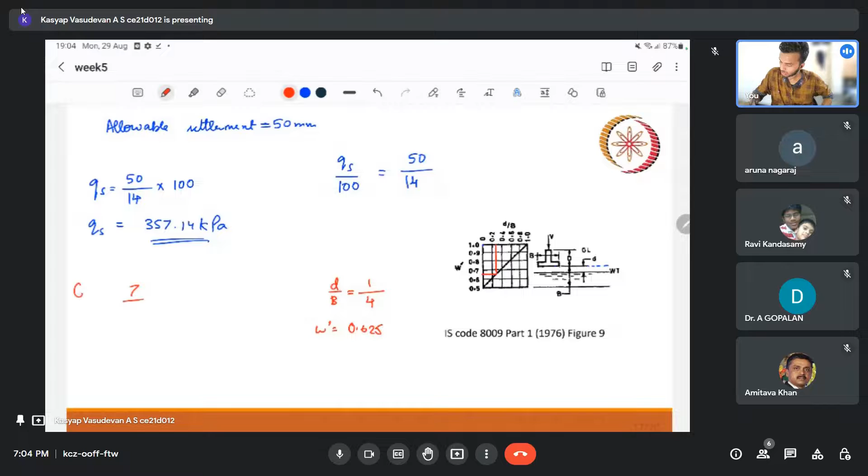Am I right? Okay, 0.625. So if you interpolate, you'll get W dash. So our new settlement will be 7 by corrected actual, 7 by actual settlement. Let me write this properly.

For water table 1 meter below foundation level, my W dash is 0.625. So our actual settlement is equal to 7 by 0.625, that will be 11.2 mm.

So for 11.2 mm, if you do the same thing here, QS will be, assuming a 50 mm thing, 11.2 into 100, you will get 446.43 kPa. So that has also increased since when we lowered the water table, our bearing capacity with respect to settlement has also increased.

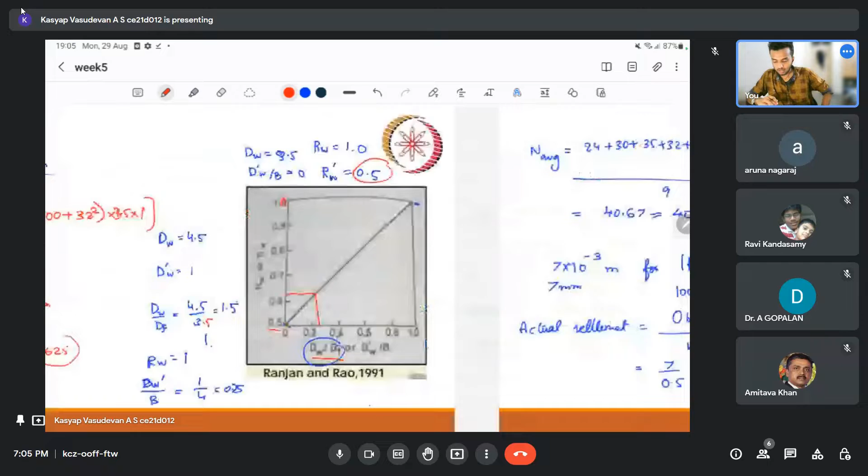However, it's very low when we compare with respect to bearing capacity. So it's quite clear that settlement is governing in this case. Generally, people with experience say that in most cases settlement will govern our capacity. So we'll have to choose this particular value. If at all this is not satisfactory, we'll have to redesign. Okay, so that's the thing.

I hope you go through those problems solved by sir also. He has taken different cases. I also have tried to cover other scenarios.

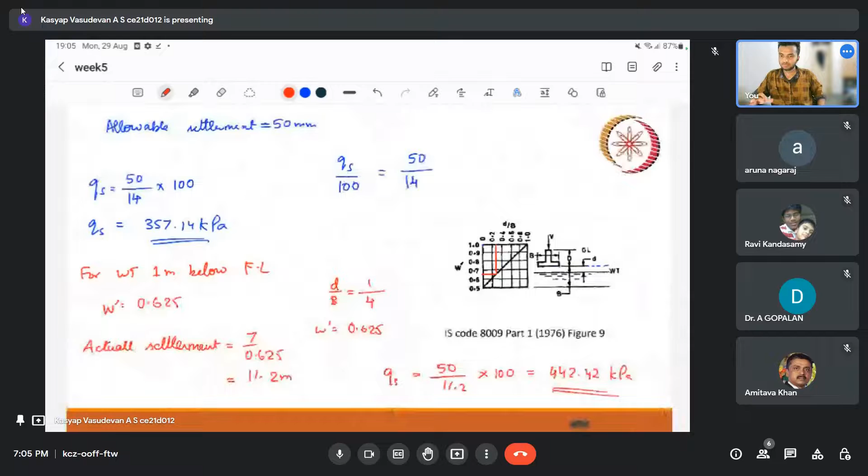So let us wind up with a small question. We have two columns, and the center to center distance is 7.5 meters. This is 7.5. Isolated footing on hard clay, isolated footing is RCC. All these points are relevant because I'll come to it. We are supposed to find maximum differential settlement.

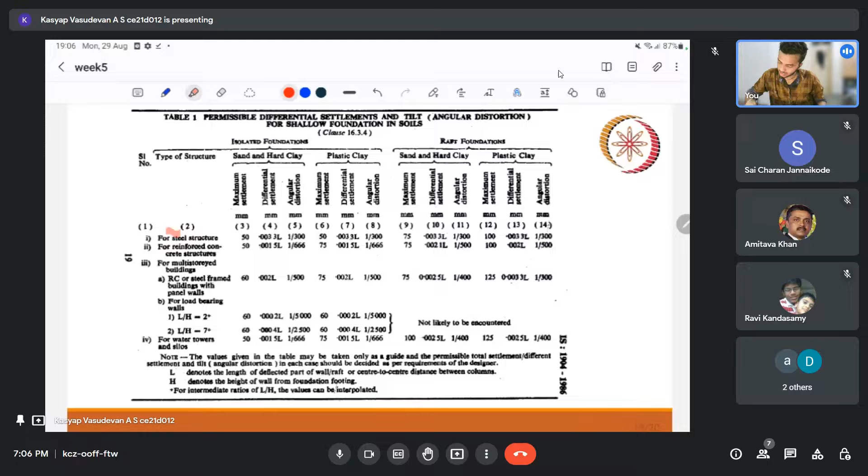In IS code, this is the settlement thing I was talking about. IS code has given different allowable settlement values. I would really recommend you go through this figure, not to memorize it, but just to have an idea. For different types of structures - steel structure, reinforced structure (that's why RCC I was talking about), multi-story structure - and for different cases, isolated footing, raft footing, and for different types of soil, hard clay, plastic clay, they have given different values: maximum settlement possible, differential settlement possible, and angular distortion.

We need to keep this in check because this will be governing our allowable bearing capacity. In the previous thing, for the plastic clay case with RCC I had taken, if you remember, 75 mm, and in the previous problem I had taken 50 mm. That is because it was hard clay they had mentioned, that's why I had taken 50 mm.

This is for raft footing - sorry, not raft footing, the previous was not raft footing, it was plastic clay, the first question. So the point is you have to check these things and confirm the correct values. Differential settlement also they have given for RCC.

It's 0.0015 L. So allowable differential settlement is equal to 0.0015 into L. L is given as 7.5. So if I want my answer in millimeter, I'll write 7500 mm. So 7500 into 0.0015, this will be 11.25. So we get the answer directly.

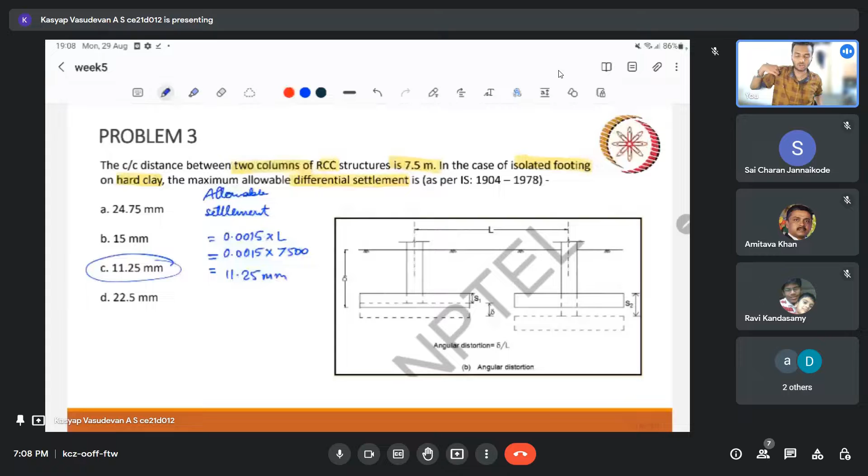This is just a highlight, that's why I thought of discussing this - because of this table. I recommend you go through this table. This is there in our IS code 1904. All the available things are given; the condensed form with only the required values our instructor has consolidated, and in one of the slides he has shown this is the actual diagram, actual table.